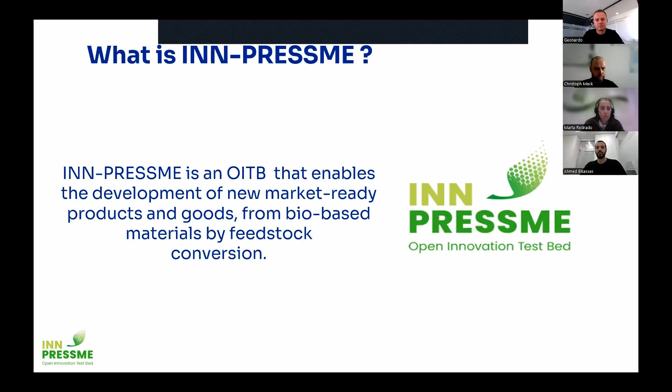I'm going to be presenting INN-PRESSME services and SEP and INN-PRESSME marketplace. So, first of all, a quick introduction. What is INN-PRESSME? I know you must have read about it, but INN-PRESSME, in a nutshell, is an open innovation test bed that consists of state-of-the-art pilot lines. These pilot lines enable the development of new market-ready products and goods from bio-based sources. So, how do we enable that? How do we do that?

So, we do that for the entities who want to develop these nanomaterials or bio-based materials. We guide you through every step of the development process, in which the first step, of course, is the interaction with the SEP, or the single entry point of INN-PRESSME, as an access point to all the pilot lines and services of INN-PRESSME, in which we guide you through the different stages of the process, starting from the formulation and processing of the materials to develop the end products, and also recycling the end products to produce reused materials, which enter the process again, finally developing the nano-enabled bio-based products, which we are aiming for.

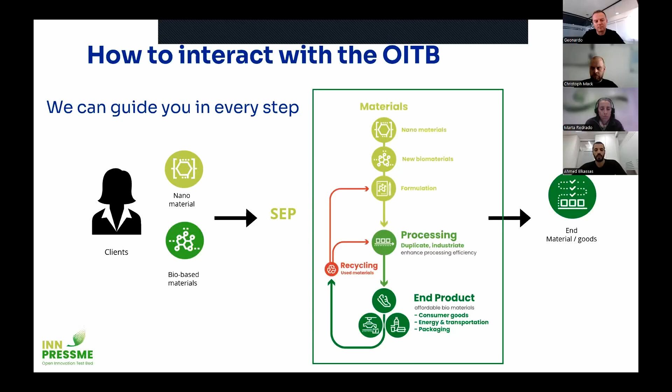Moreover, through the interaction with the SEP, you can get access to the OITB assets, but also to top research centers, the open innovation ecosystem, technological partners for your projects, and even events for your business that can help you in this development process. And of course, one of the ways to access the INN-PRESSME marketplace and interact with the SEP and the ecosystem is the digital platform, which I will make a quick demonstration about now.

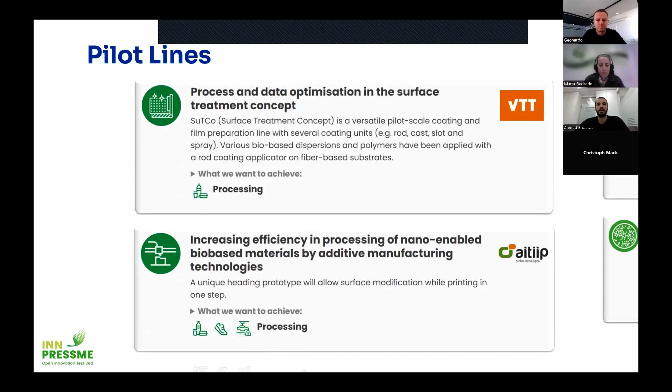And then the second pilot line is an additive manufacturing 3D printing pilot, which allows surface modification while printing, which allows increasing efficiency in processing of nano-enabled bio-based materials through additive manufacturing technologies. And then the pilot by Cidetec for the production of electrodes for the optimization of the production of bio-based materials.

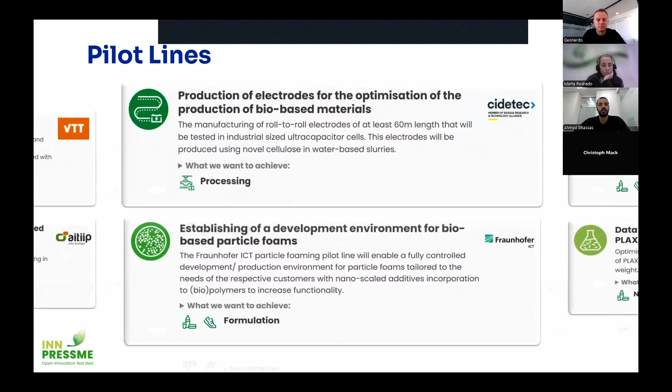And then the pilot by Fraunhofer, which is the foaming pilot line, which establishes a development environment for bio-based particle foams. And then the pilot by Fraunhofer ISC for improving the quality of bio-based coatings and nanoparticle synthesis. And then another pilot by VTT for data mining as the basis for efficient production of PLAX copolymers.

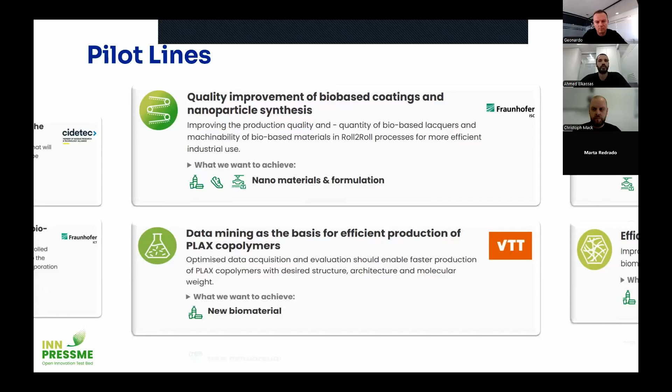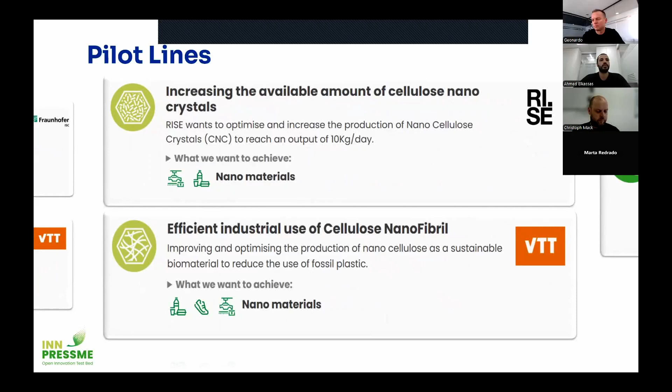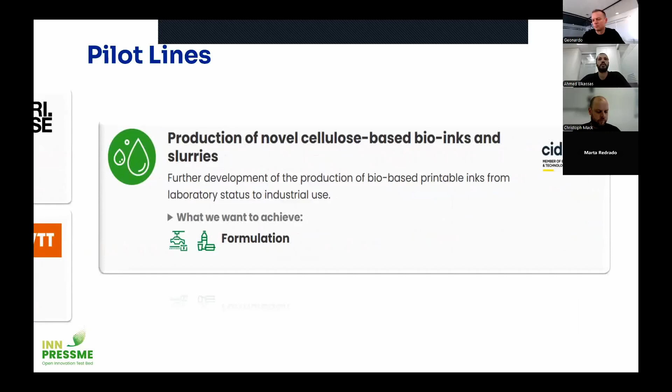And then the pilot by RISE with an increased and optimized level of nanocellulose crystal production. And then another pilot by VTT, which is starting the efficient industrial use of cellulose nanofibril. And finally, the pilot line by Cidetec for the production of novel cellulose-based bioinks and slurries. And this basically sums up the different pilot lines of INN-PRESSME.

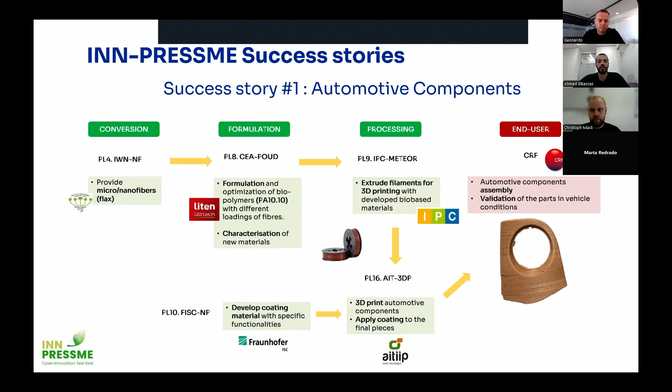In parallel, Fraunhofer developed the coating material, and the last step was to do the 3D printing using this coating material and the extruded filaments, which in the end gave us the required product for the automotive industry, in which our partner for the project was CRF.

And then comes the second success story, which was for the development of inner shoe soles. And similarly, the first step was the conversion stage, providing the hemp, which went to the step of formulation optimization of the biopolymers with different loadings of fibers and characterization of the new material. And next it went to the step of processing the new materials to extrude the filaments that would be used for 3D printing. And in parallel, Fraunhofer developed the coating material.

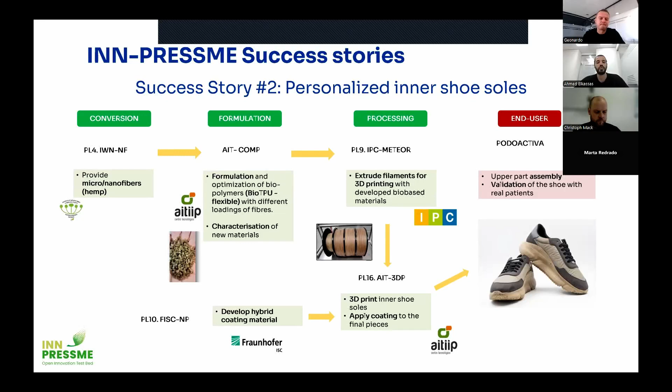And the last step was to do the 3D printing using the coating materials and extruded filaments, which in the end gives us inner shoe soles from bio-based sources, which was our goal. And that would be the summing up for this.

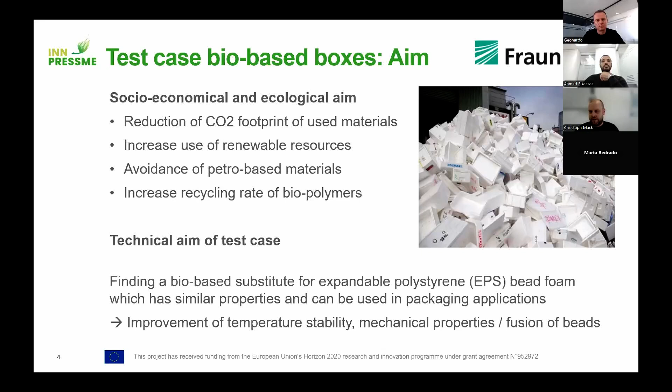To achieve that goal, we needed to optimize or further develop the bio-based foams that are already existing, especially with regards to temperature stability and mechanical properties, which in the end is also related to the fusion of the single beads of the foams. What was our approach?

We used polylactic acid as a matrix material. This is one of the most available biopolymers worldwide. It's also one of the biopolymers, or the only one with a, I would say, close to reasonable price, especially with regards to the technical performance of the material. So we chose this material as a matrix.

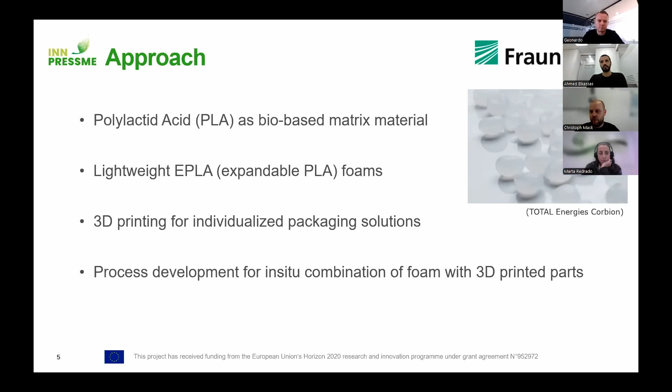We developed lightweight expandable PLA foams to be able to use them in the existing processing infrastructure, which is there in the industry. We also developed 3D printed components to individualize packaging solutions. And in the end, we wanted to process everything together in a one-shot process to combine the foam together with the 3D printed parts.

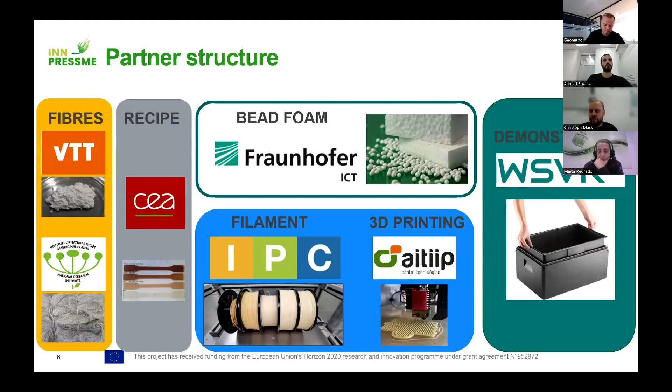Coming to the partner structure of this test case, we had on one side the material providers with VTT, IWNiRZ, who provided the fibers. Then we had CEA, who developed a recipe for the 3D printing filament, which was then produced by IPC, AITIIP, who did the 3D printing, Fraunhofer, who did the bead foam development, and WSVK, who in the end was our industrial partner, who did the manufacturing of the demonstrator parts.

When we come to the 3D printing, we used cellulose nanofiber reinforced PLA, which was provided by VTT and which was compounded by CEA. The filament was developed for the 3D printing, and in the end, those CNF reinforced filaments were printed to components. In this case, it was a data logger or a holder for a data logger, for example, to log or to track the temperature inside of a thermal box.

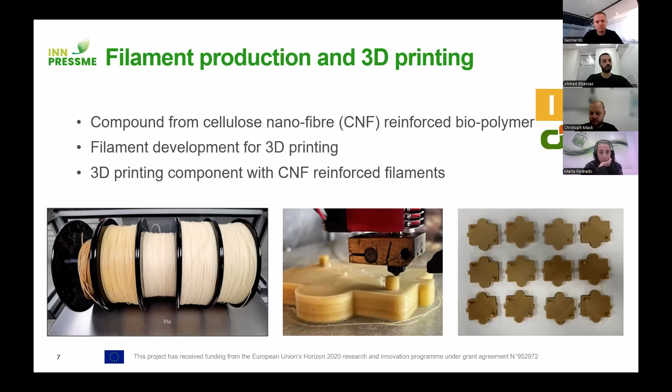Coming to the bead foam development, which took mostly place at Fraunhofer ICT, we developed a special recipe made from PLA. We loaded this recipe with gas to receive expandable granules. Those were then pre-foamed and molded to a sample geometry, and then we did the characterization. And this was done several times, of course, in an iterative way to improve the properties.

Here you can also see the single product throughout this processing chain. So we have the gas-loaded beads, which can be expanded a little bit like popcorn in the end. Then we have the foamed beads, and these foamed beads are then molded together with steam to such a part. In the end, in this case, it's a sample geometry.

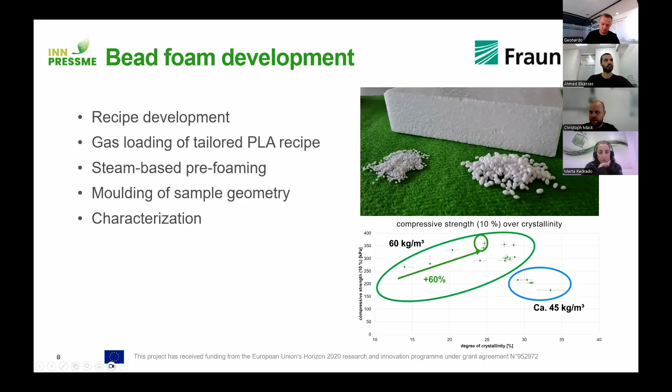Then we did the upscaling together with our industrial partner. So Fraunhofer provided the material, 5 recipes in total in a larger amount. So WSVK could produce on their demonstrator tool 55 samples in the end, which were then again analyzed to check which was the best of these recipes. And in the end, we achieved improved temperature stability and mechanical properties at the same time, which was also the goal of our development.

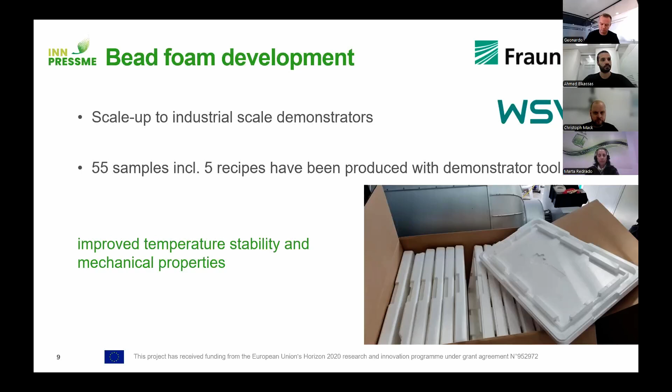And WSVK also made a quick video of this demonstrator production process, so you can get an impression of how that looks.

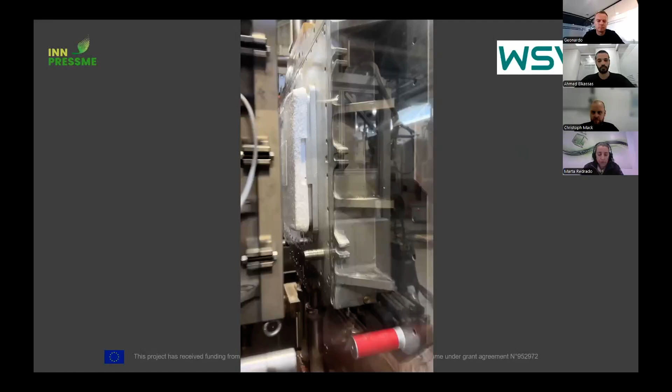And so what do we have in the end? The final result of the test case is a non-petro-based packaging demonstrator made from close to 100% renewable resources. In this case, it's a lid of a thermal box made mostly from PLA, some fibers. And you also see here the data logger holder, which was 3D printed and incorporated during the production process.

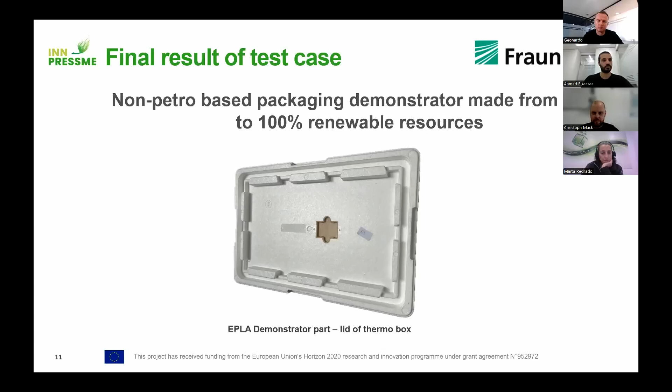Coming now to the technical services for industry, which we as Fraunhofer ICT can provide. So already before the project, we had an existing platform for development of bead foams along the whole processing chain. This was further upgraded during the process, so we can offer additional services now.

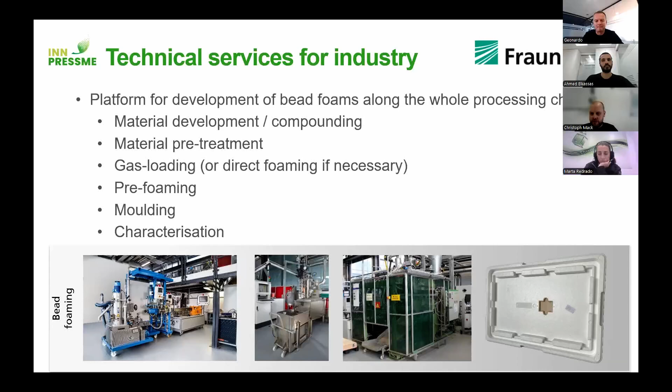What we can do is to really cover coming from the polymer to the final product. So material development, compounding, material pretreatment like coating or drying, then the gas loading, the pre-foaming, the molding, and also, of course, the characterization, which is always important for such a development in the end.

Coming to the single process steps, to give you a little bit more insight on what can be done and also on what scale we are working. So for the bead foam extrusion, we have a Leistritz twin screw extruder with a 27 millimeter screw and a throughput of up to 50 kilograms per hour, a Gala underwater pelletizer with up to 10 bars pressure, and we can dose various blowing agents, being CO2, nitrogen, pentane, propane, ethanol, so more or less all which is common in the foam industry.

The throughput is enough to provide enough material also if you want to do pre-series with your developments, or you have a material that you would like somehow to upscale. So here we can really provide hundreds of kilograms or even a few tons for your development.

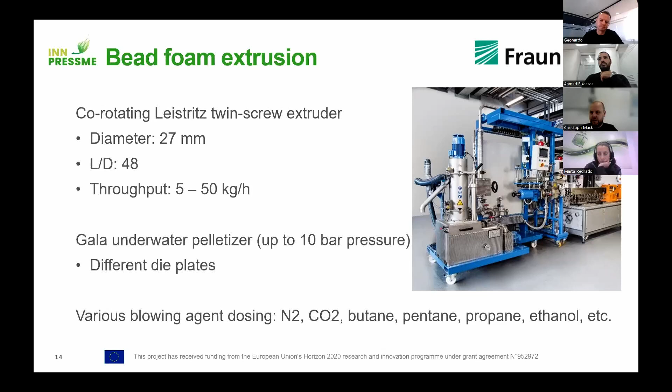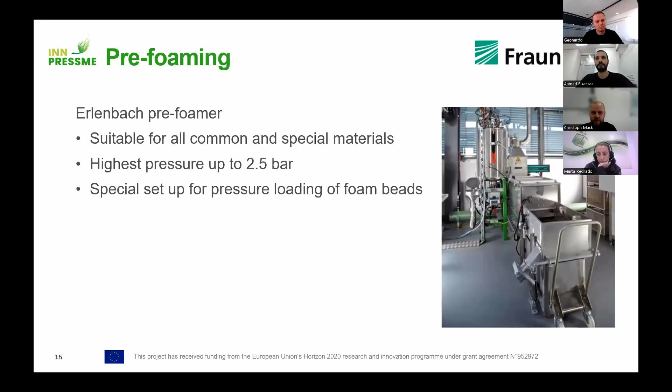But also, of course, on the other side, low amounts are possible, which are then processed, for example, in our lab with our pre-foaming unit, which is a small industrial scale pre-foamer, suitable for all common and special materials. The highest pressure is up to 2.5 bars. And we also have a special setup for the pressure loading of the foam beads.

Coming to the bead foam molding, we have two options here. We have an Erlenbach steam chest molding machine, which is also small industrial scale. But we have one specialty here. We can go up to 7.5 bars in steam pressure, resulting in a wider processing window, and also enabling the use of materials which need higher temperature during processing.

The second technology, radio frequency molding, which is quite new, coming from the company Kurtz, is also available. In this case, it's more like a pilot scale. Here, radio frequency is used instead of steam, and it works a little bit like a microwave in the end. And we can have molding temperatures of more than 240 degrees. This is also a really broad processing window for polymers which may not be suitable in the steam chest molding process.

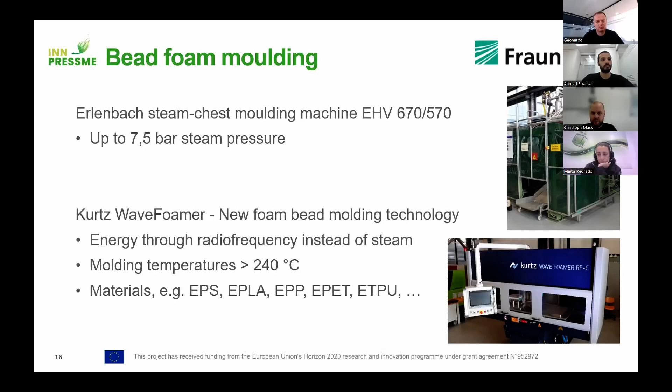Coming to the upgrades that were done during the project. We developed a viscosimeter, which is now installed on the bead foam extrusion line. It helps us to control and monitor the process, resulting in better quality control of the whole process. And we can study the influence of blowing agents and additives on the melt properties. Viscosity is always a big factor, especially when blowing agents are added. You change the viscosity of the melt, and therefore you see really nicely and sensitively if there are changes in the process or in the dosing system.

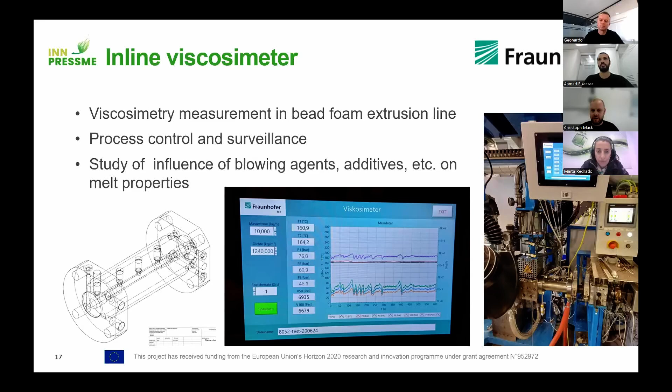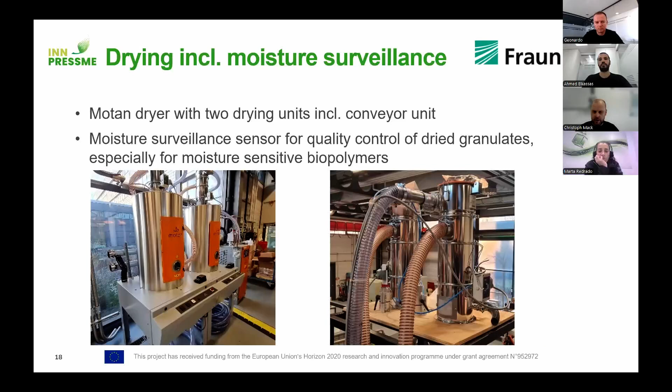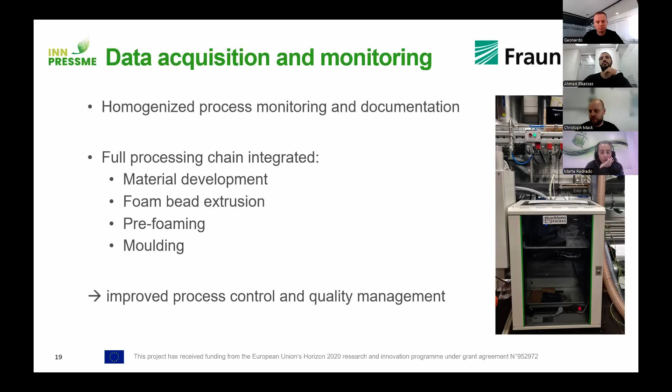And then the last upgrade was a very big one. We installed a data acquisition and monitoring system along the whole processing chain of the particle foams to homogenize our process monitoring and documentation. So we can now track the materials from the delivery till the final product and during characterization. We have a tracking history with regards to process parameters, recipes, and additional values from the environment like temperature or pressure. And therefore, we can target the developments much more, also with regards to data-driven analysis.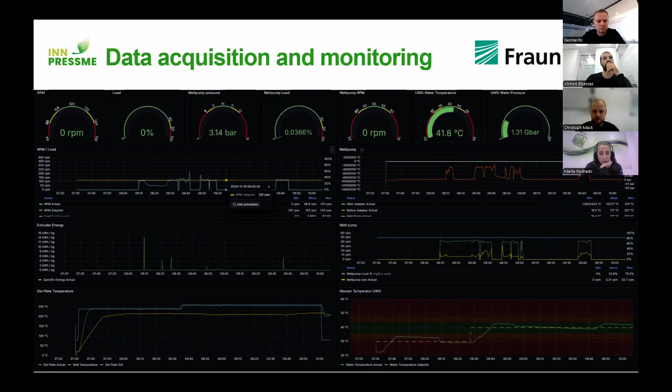Coming to the conclusion. We successfully implemented the test case bio-based boxes, so you see a very nice demonstrator case in the end. Fraunhofer ICT offers services for the development, testing, upscaling, and processing of bead foams along the whole processing chain. And we have long-standing experience in the development of thermoplastic foams, bio-based materials being the core of this project, but also other materials like petro-based or recyclate materials.

Additionally, I think Marta will say a little bit more about AITIIP services, but I also want to mention that AITIIP offers services for 3D printing as well, and AITIIP was also part of this test case.

Thank you very much, Christoph, for the very interesting presentation. It was a very impressive user interface that you showed about the data control and monitoring, and the video was nice to see the result that can actually be taken to the hand.

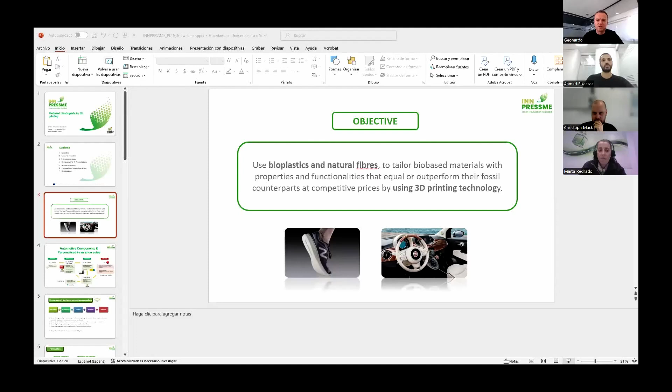Marta? Sorry. Yes. Interrupt you. I don't know. Are you changing slides? Because I don't. Yes. Does everybody see it, or is it just me locked on the? No. Marta, can you put your screen into presentation mode and then? It is in presentation mode. Because it doesn't seem like if it is in present. But now it's skipped to the right slide. Yes. Now it's slide 3. It's slides. Yeah, but it's not in presentation mode, isn't it? No. It's not in presentation mode, but at least we can see the slide. Yeah, maybe you can customize the toolbar, then it's a little bit bigger. Yes, I'll do that. I'll try to make it, as big as possible. Yeah, it's good now as it is.

So I was explaining the partners involved. I was talking about IPC, who transformed the compound that CEA and AITIIP produced with these bioplastics and fibers into a filament that could then be used for 3D printing the end user pieces. Our end users were CRF for the automotive part, and Podoactiva for the inner shoe sole.

In parallel, as Ahmed mentioned, we had partner Fraunhofer, who developed a coating that gave these final pieces antibacterial properties, and in some cases better behavior against, for example, the sun action on the car piece.

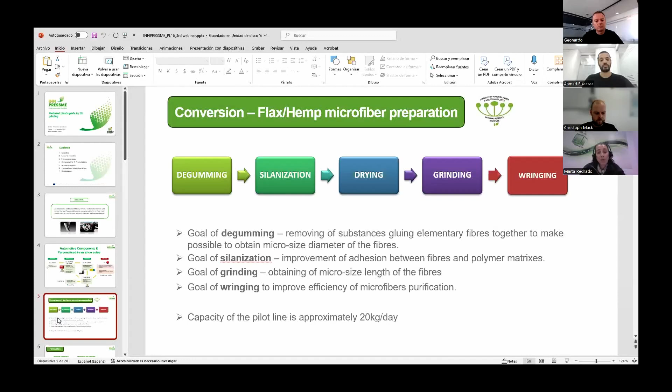The next slide summarizes the process our partner IWNiRZ had to prepare for the fibers to be added to the polymer matrix. The degumming was done to remove substances, so as to obtain a micronized diameter of the fibers. The silanization was done to improve the adhesion between the fibers and the polymer matrices. The grinding, as its name says, is to carry out the micronization of the length of the fibers, and the wringing, which was introduced a bit later in the project, was done to improve the efficiency of the microfiber purification.

Once the fibers were ready, the next step was to introduce them into those matrices to produce the compound. For the automotive components, CEA used polyamide 1010 with 5% of flax fibers. For the personalized inner shoe soles, at AITIIP we selected Bio-TPU with 5% of hemp fibers. This selection you see here is just one line - there were a lot of iterations with different percentages and different types of biomaterials, but these were the ones selected after analyzing both the printability and the mechanical properties of the materials.

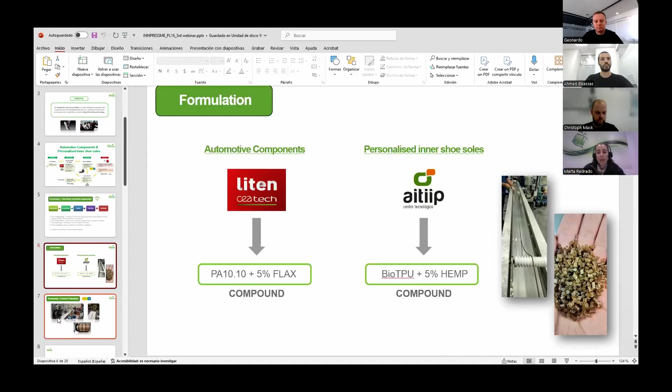Once we had the compound, the filament was produced for then being able to transfer the material to the 3D printing process. Let me show you.

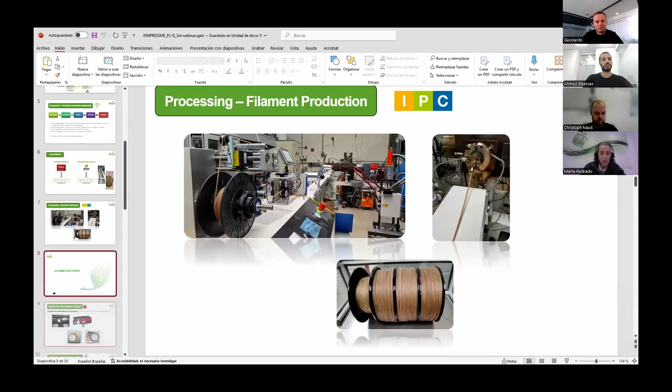So for the automotive parts, the process that I just explained until now is common for both test cases, but now I'll go into more detail for both, starting with the automotive production.

What we did is the aesthetical trim on the dashboard, the one you can see here on the left, on the driver's side. That's the one we decided to print. Nowadays, this air vent fascia is manufactured via injection molding using polycarbonate and ABS materials. But since the Centro Stile is often asking for a special series with an associated low volume production, the idea was to produce this trim using additive manufacturing instead, so it's a cheaper and faster solution than having to produce a mold specifically for these short run pieces.

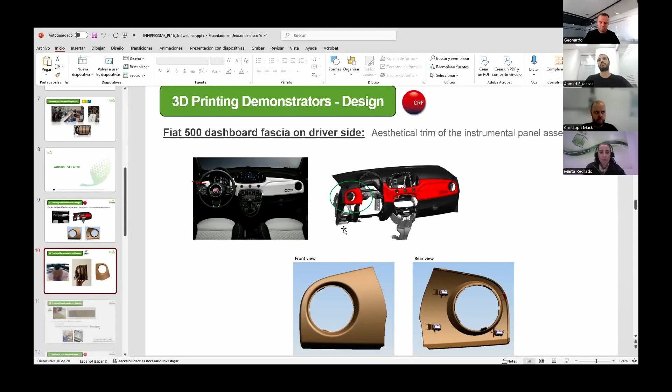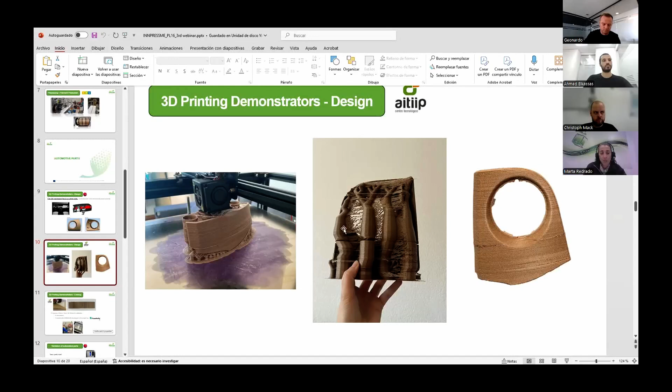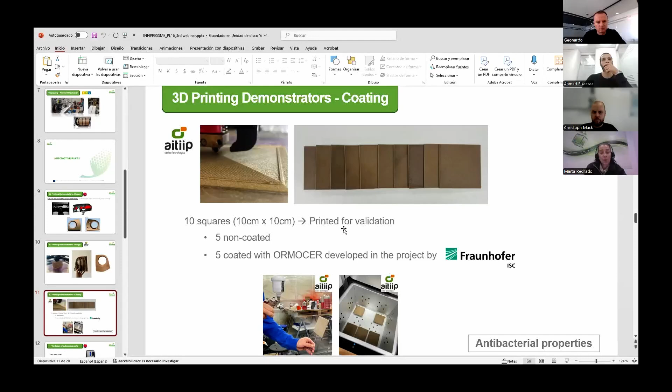Instead of printing a lot of demonstrators, because it was quite difficult, what we did is print these squares that you can see in the picture, and they were tested with and without the Ormocer coating developed by Fraunhofer, which confers antibacterial properties.

And considering the light aging, we can say that the coating, as I mentioned previously, has proved that the material is better with this coating - it stands the aging through the lighting better with this coating that Fraunhofer developed.

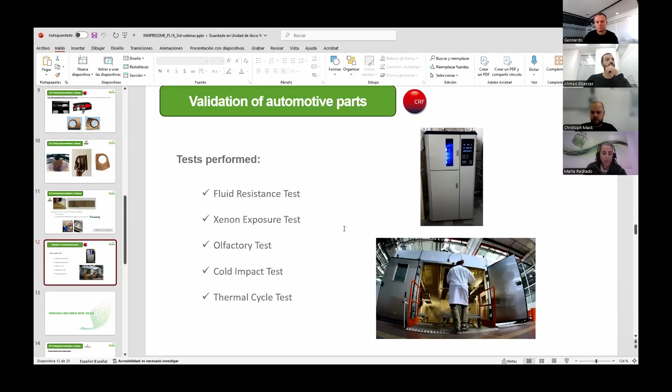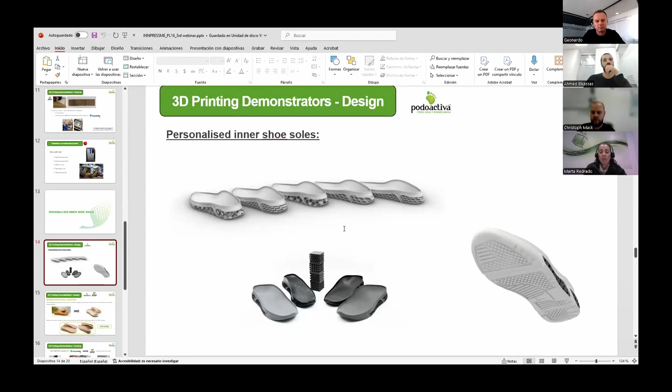For the personalized inner shoes, before fabricating the final demonstrator - that there's been a video and some articles about - lots of different design iterations were necessary in order to achieve what the product required. It's something that cannot be too hard, it cannot be very flexible, but it needs to hold the weight of the person. So a lot of tests and iterations in the design were performed.

The initial design, you can see there, it's very nice - you can see the inside of the structure of the inner shoe sole. But this initial lattice structure didn't provide adequate support, particularly on the heel area, so it resulted in instability while walking. So what we did, together with Podoactiva, was decide that the entire shoe sole should be joined together to prevent the formation of redundant walls generated by the fused 3D printing method.

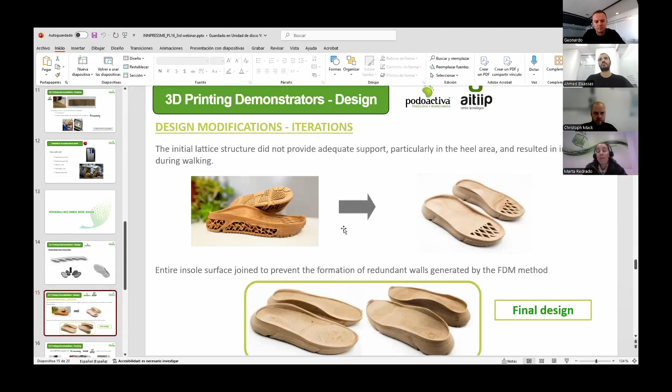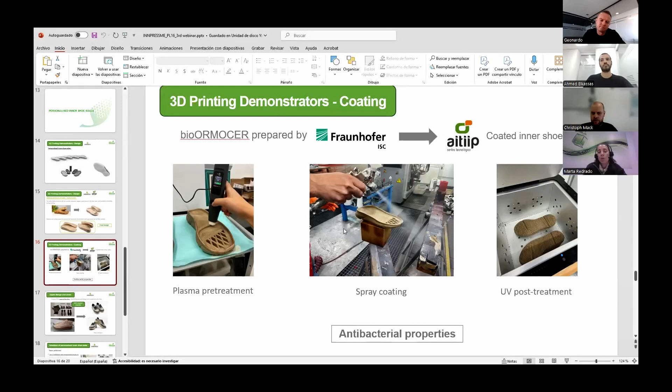This demonstrator was also coated with the bioORMOCER prepared by Fraunhofer. In order for the coating to give the antibacterial properties and to attach properly to the sole, it was necessary to follow the steps shown in the picture: apply a pretreatment of plasma, then spray coat following the directions provided by Fraunhofer, and then apply a UV post-treatment to fix the coating and let it dry and cure.

The validation of this demonstrator was carried out with four different individuals wearing three different types of shoe soles. The first one was a normal shoe sole without any personalized insole. Then a generic shoe with a personalized Podoactiva insole, and the third one, the one fully created in INN-PRESSME, the custom footwear.

What was measured were the differences between the mean pressures, the maximum peaks of pressures, the total contact surface area, and also a lifetime test was carried out.

In INN-PRESSME, the results we could see for this testing show that this inner shoe sole reduces the maximum peak pressures and the mean pressures. Also the lifetime test, after applying more than 10,000 cycles of metatarsal flexion—this is the movement that the foot does—showed that the prototype had no permanent deformation or damage, so it was considered appropriate for the market.

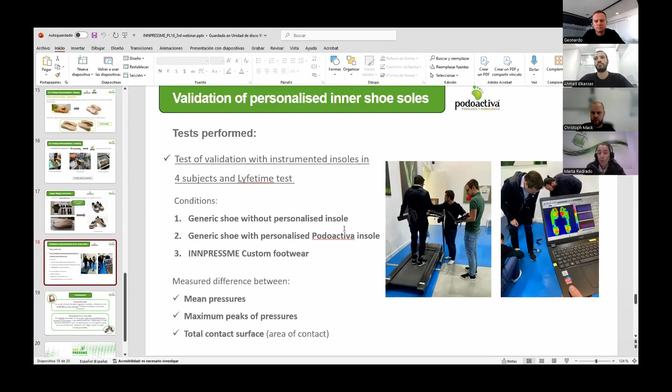So just concluding, the automotive parts work has given good and positive confidence on the applicability of this biomaterial to produce short runs of interior automotive components.

And for the personalized inner shoe sole, the material meets the specifications and technical requirements of a specialized podiatrist. It's been observed that it meets the requirements of a therapeutic insole, and it's demonstrated its resistance over a high number of cycles, indicating that it's durable.

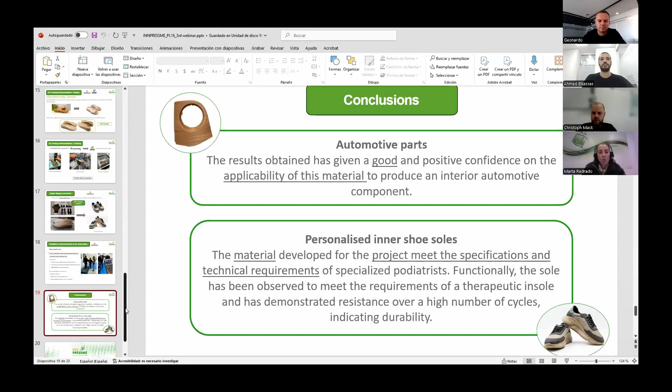So just finalizing, I didn't include what the technical partners can offer. But as I mentioned in my first slide, I'll go back to that one—IWN can provide any type of micro or nanofibers.

CEA and AITIIP can do, amongst many other things, the compounding, studying how the materials behave, whether it's possible to mix them, and in which quantities.

IPC is specialized—they've got the Meteor special machine to do the filament at industrial scale. Then Fraunhofer, of course, has the registered ORMOCER mark to achieve antimicrobial and other properties that improve the material.

At AITIIP, we can do these biomaterial 3D printing runs, which not all machines in the market can work with, since most really big industrial printers only allow their own proprietary materials, not an ad hoc material. At AITIIP, we can do it at TRL 6-7, and now we've got a new printer which will allow us to go to higher TRLs and industrial scale. That's what we can offer. Thank you.

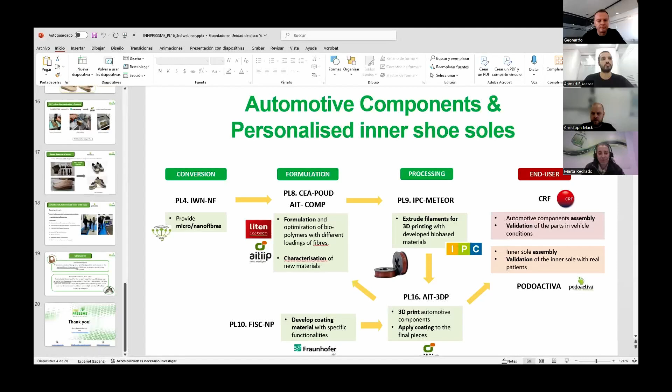Thank you very much, Marta, for this interesting presentation. It's good to see that the personalized inner shoe soles have been developed and people can wear them and actually use them for everyday purposes. This is really good. And I also understand that the upper part of the shoe has been provided from recyclable materials. So thank you very much for the presentation.

I'm taking a look at the chat box or the Q&A. I think we have a comment there about seeing the prototype live on YouTube. So if you feel like checking this first prototype on YouTube, you can go there.

I'm also taking a look at the chat box, and I don't see any questions there. So maybe I will have a question to Fraunhofer. I remember from this video that there were these cooling bag lids, right? They look really good, and it's made of these foamed beads.

Did Fraunhofer conclude any kind of investigation or research or background action to see what is the degradability of this foamed bead, or any biodegradability issues? Is there any action taken on that part?